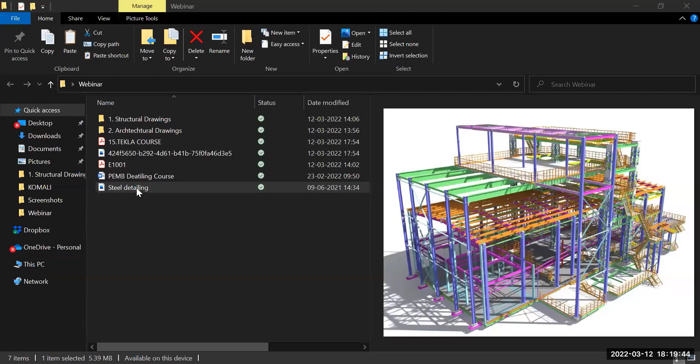I'll show you what is in Tekla Structures and what we can learn in Tekla Structures, and what things we can learn in the civil engineering, structural steel industry.

Guys, in the Tekla Structures, the screen is visible, guys. Hello? Yes, sir. Yes, sir.

This course is completely based on 45 hours of time. In these 45 hours, we have separated every element of what we are going to learn in this session.

See guys, first starting with Tekla Structures, we are moving into the detailing part. Tekla Structures is a tool which gives an output like a 3D model and 2D detailing drawings.

We will go deep in the learning sessions, but I'm just giving you an idea why we are using Tekla, what outputs come from Tekla, what PEB is, and what the difference is between PEB and main steel buildings.

PEB buildings are pre-engineered buildings. These buildings are very light compared with complete structural steel buildings, and mainly these PEB buildings are used for cold storages, storage facilities, and some commercial purpose things. These PEB buildings are very lightweight and cost-effective.

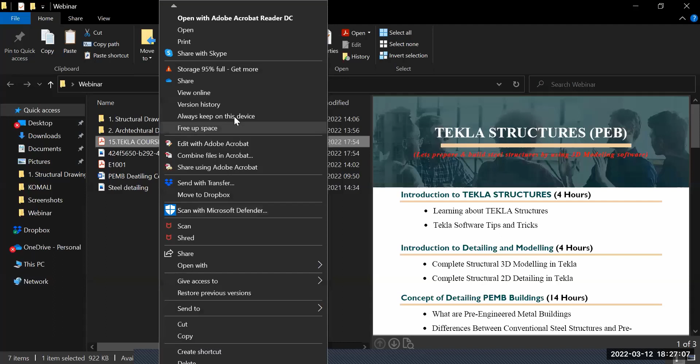I have opened it properly. It's still... So try to use Microsoft Edge, open with Microsoft Edge, I think it will work. I think it's default, it's going to pause. Right click it and open it. Yeah, that's what I did.

Now you can see, guys. No, sir, actually it is not. So please try... Stop screen sharing and you can try it again. Yeah, I'm trying.

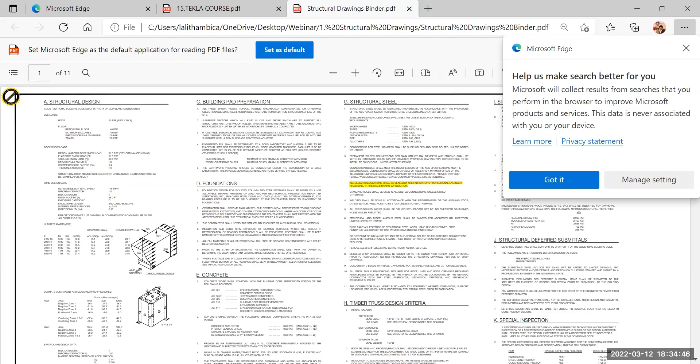Sir, still it is not on our screen, the main screen. I think you are showing something, but we are only seeing... Microsoft Edge please, right. Can you guys see this now? Yes, sir, it's fine right now. Fine, right?

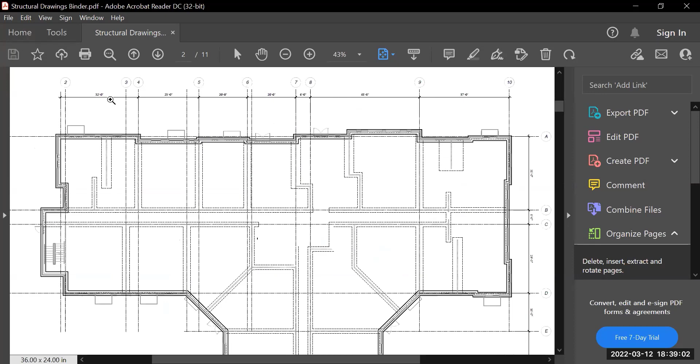What walls have they used here? What is the wall dimension? These we will call grids.

These things are grids. Whenever a building is constructed, without a base point we can't do anything, and without proper planning we can't do anything. These are the things we need mainly.

If we are going to construct a structure, the grids play the main role in a complete steel building. They give X grids as well as Y grids. These are the grids, and this is the complete foundation plan.

In this foundation plan, if you take a structure, it will be in different levels everywhere - starting from foundation level, level 1, level 2, level 3, level 4.

Following the same procedure, we get the drawings accordingly. If there is a foundation level, we get a foundation plan. If there is something on level 1 - slab, doors, windows - we get the level 1 plan. Same with level 2. So depending on how many levels they are going to construct, that many level drawings they give us.

It's a complete design set. There is a complete difference between designing and detailing. They will design the building, and we will detail the building.

We help the fabricator and erector to construct a building, and architects help structural engineers form a 3D building and produce detailed drawings for the fabricators.

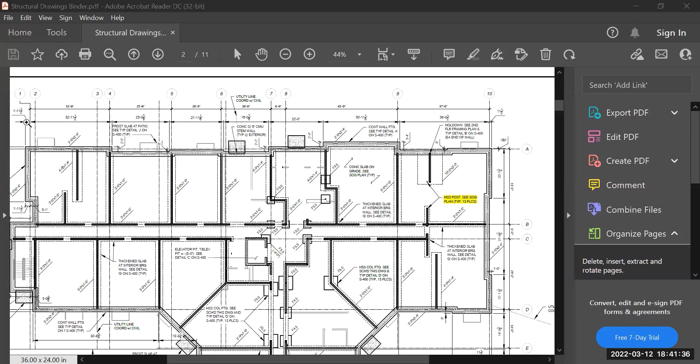So these are the main things. If you see this detail, if you see the structural drawings, they have given complete details. What are the things they need to construct? They need to construct this concrete wall. See this 2 feet, 2 feet 4 inch, and what is the slab type, and what is the concrete CMU stem wall, how many inches of CMU wall, everything they will give.

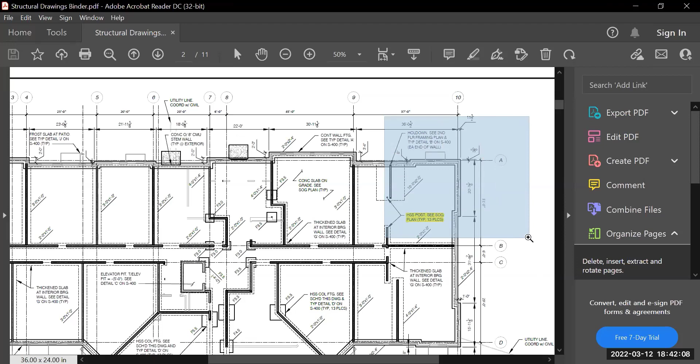And we are going to, this is just a 2D drawing. We are going to form this wall in 3D with the help of Tekla Structures. See all the details they will give, what they want to build. So before erecting, before forming a structure on a real site, we are going to construct the building using this software.

And we are going to construct first, and we will see what we will see, and we will rectify the problems, and we will grab the problems, and we will provide a solution. We will have complete contact with the architect, and we will have conversations.

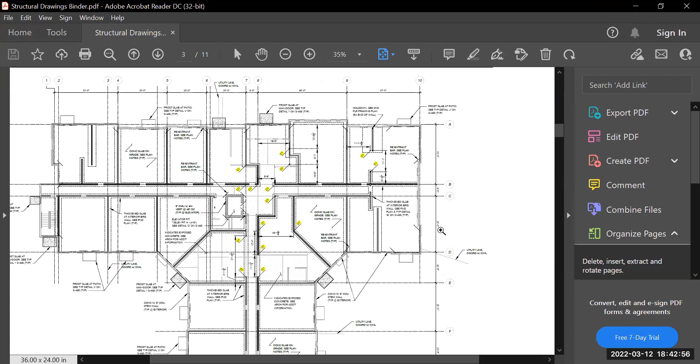If we are facing any problems, they will help us, and with their help we are going to complete the structure. See, this is above the foundation, there is one floor. This is the plan of that floor. See everything, concrete slab, what is the slab, what are the things in the building, you are going to see here.

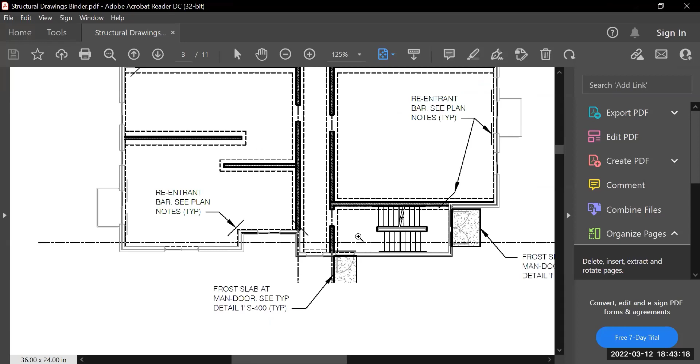Slab, what are the entries, where is the staircase, what are the entries, doors, windows, everything we are going to see.

See, this is the second floor framing plan. So in this, we are having trusses, 24-inch deep wood trusses. What are these trusses? What is the beam? What are the beam sizes, column sizes? What are these things? See guys, if you see here, these yellow markings are beams.

So what is this beam? What is this W18 by 76? What is W14 by 34? If we see a design drawing simply, we don't know what these things are. We can't understand. So we are here to help you understand the things.

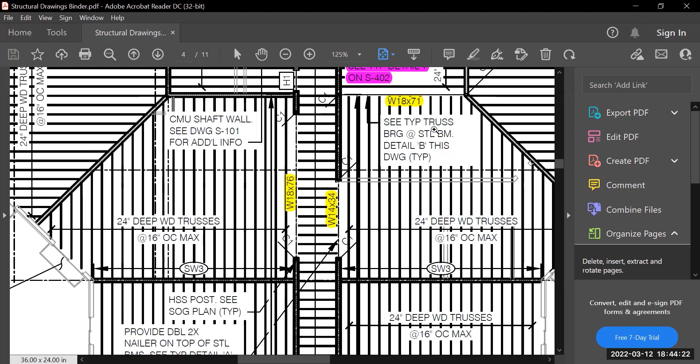We are here to help you go and perform your best wherever you join or wherever you work. So these are the things we will get from the clients.

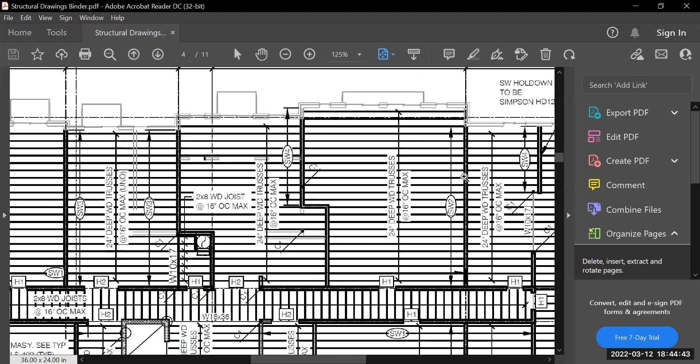Yes, it's a complete second floor framing plan. What are the things they have used? Steel beams, 24-inch deep wood trusses. So what are the distances we need to follow? What are the things we are going to place? What are the things we need to detail?

Everything they will give. See guys, everywhere these grid dimensions were there. So the complete structure is based on the grids. Without these grids, we can't do anything. Frankly speaking.

See, this is the fourth floor. You see this? This is second floor. This is third floor. This is fourth floor. You can see the title also here. This is the second floor drawing. This is third floor drawing. This is fourth floor drawing.

So every floor, each and everything that is in the floor, what we are going to keep, what they are going to construct, everything they will give, not just simply a design drawing or nothing like that. This is completely a full-fledged detailed design sheet. We are going to prepare a 3D model with the help of this only.

If we miss anything, any small detail also, we will face the issue. That is the main reason nowadays clients prefer more advanced software, just because of accuracy, just because of quality. They are going to pay, but they need quality and accuracy. We can't get quality and all from other tools, but Tekla Structures is completely designed for structures, steel structures.

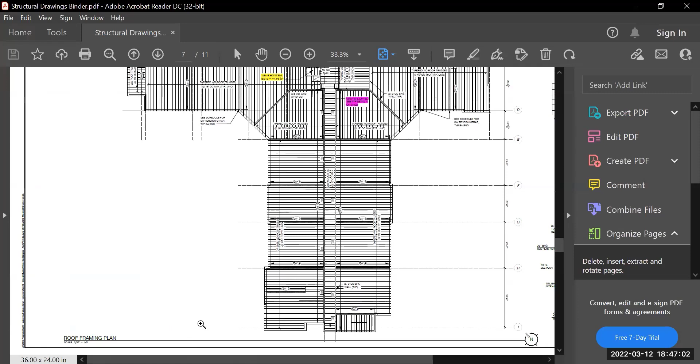See, this is the roof. Completely the top of the structure, roof. So after this, there will be nothing. This is the last plan. After that, see this, all the four side elevations.

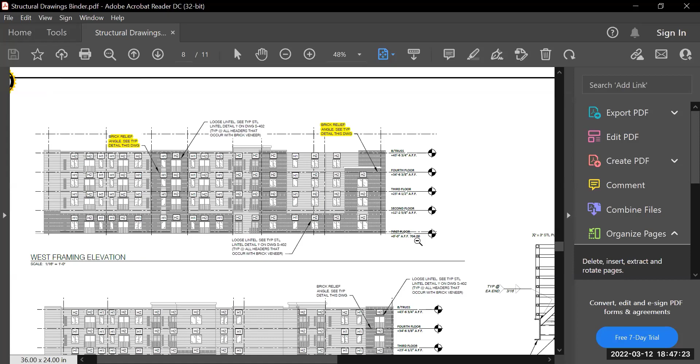West framing elevation, south framing elevation, east framing elevation, north side framing elevation. So four sides, how the structure is. These many floors are there. If you see, every floor, from where it is started. This is the 0, 0. From 0 feet to 43 feet. So a 4 floor building, 4-storied building.

So what are the windows that are there? So where are these windows? What are the things?

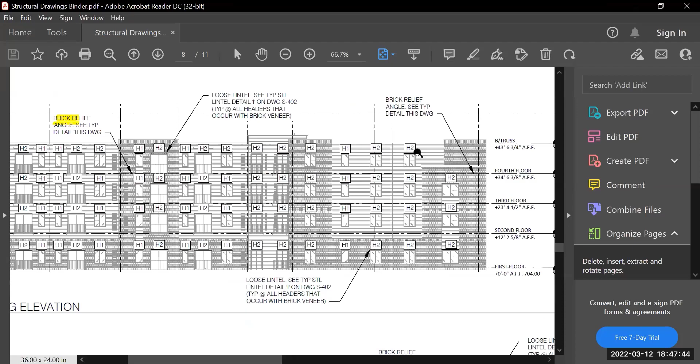What types of windows have they used here? Everything they will give in detail. See this complete details - what are the plates they have used, what are the metals they are going to use in the field? We are going to place this completely. Whatever you guys are seeing, we are going to place in the 3D - how the real plate is, how the real beam is, everything, how the site, the job is going to erect in the site. You are going to model that in Tekla Structures. We are going to learn about that complete 3D modeling.

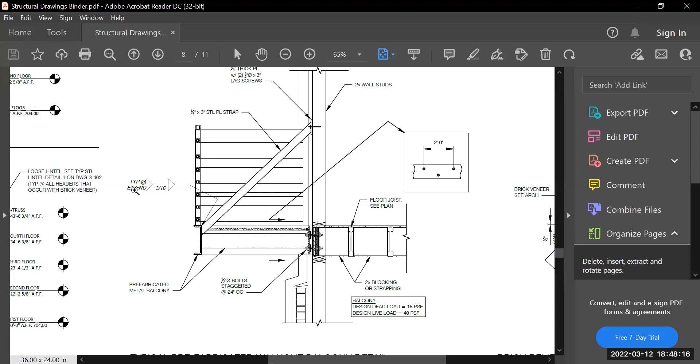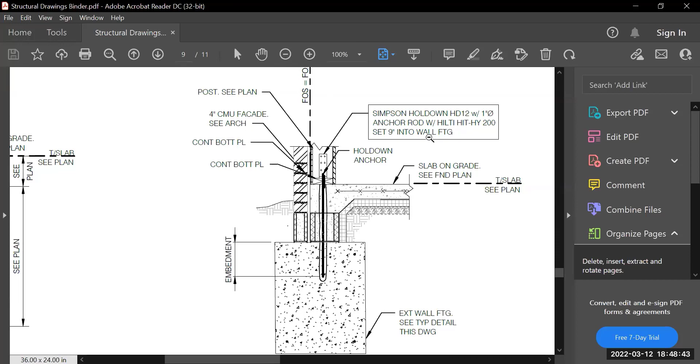Footing details, foundation details. And I'm giving you one more clarity guys - we are not going to do anything which is related to concrete. We will just place it for our reference. We are completely on the structural steel buildings.

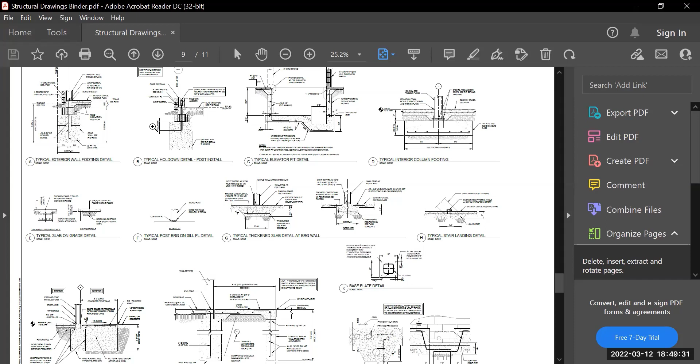Those are PEMB buildings, pre-engineered metal buildings. There is completely different between PEMB buildings and structural steel buildings. If you Google, guys, you will get to know. And even in our course, we are going to tell you about the differences between these PEMB buildings and structural steel buildings. Structural buildings are very high cost and very strong also, but PEMB buildings are not like that. These are strong, but very cost effective buildings, and as well as very simple to fabricate and erect. That is the difference between the PEMB buildings and structural steel buildings.

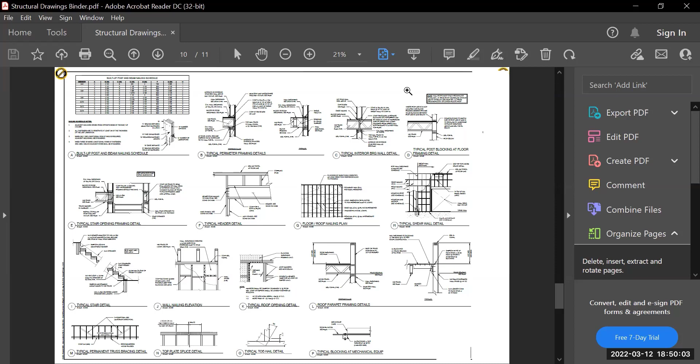We are not going to learn about PEMB buildings completely, but what I am showing you guys is an example - that's it, what drawings we are going to get from the clients. Don't think on this job we are going to work or we are going to learn, this is just for your reference, like what things we are going to learn and what things will be available in this structural steel detailing part. I'm just showing you, that's it.

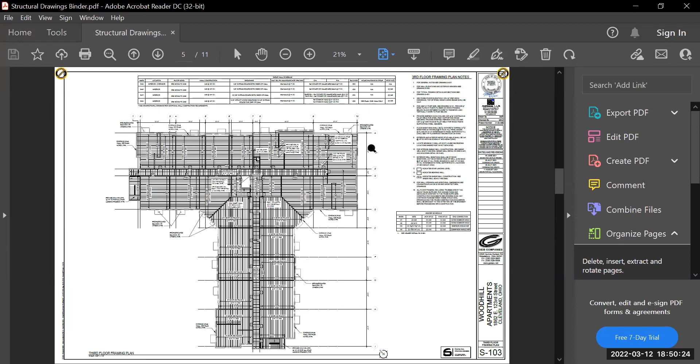See this complete lintels, bearing details, everything they will give. This is the input from the architect. With the help of this input only, we are going to produce the complete drawings. This is the complete set of a design drawing.

These are the main first phase. If you get any project, if you want to start any project, you need this page - without this page we can't do anything. This is the basic part of the structure. You will get the complete details here.

Like what are the structural steel? What kind of structural steel we are using to construct this building? Wide flanges, tubes, high strength bolts - what are the bolt types, bolt standards? Everything we are going to learn, how the bolts will be.

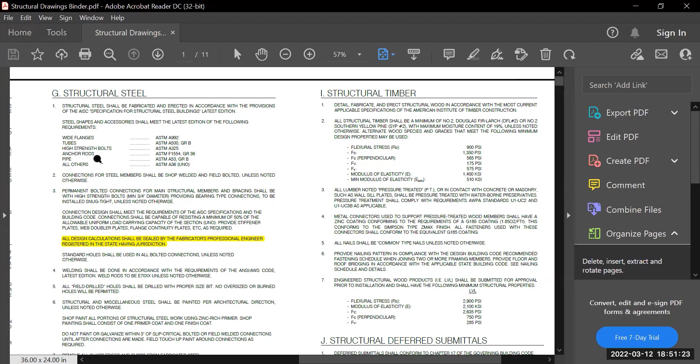If you went to any workshop or any fabrication shop, you will see the bolt, right? Whatever the bolt is exactly there, we are going to model that bolt in Tekla Structures. So if there is a problem, we are going to solve it - we are going to solve it here itself.

That is the most interesting part in Tekla Structures, the problem solving. And you will get to know about all the advanced things, whatever they have developed till date. We are working on the latest Tekla Structures, 2022 versions and 2021 versions. And there were some versions - 2020, Tekla 20 version is there, Tekla 21.1 versions are there.

Some clients will use Tekla 21.1. Why? Because Tekla Structures, they are completely advancing their tool. Tekla 21.1 is the last version which is friendly for everyone - we can easily learn in that, we can happily understand that. But 2021, 2022 are most advanced and somewhat bit complicated to understand. Those are highly advanced, and we are going to learn on the 2021 and 2022 versions, and as well as 21.1 also. For understanding purpose, we will cover everything.

Nothing like this and that only. Why? Because as we promised you guys, if you are going to join a company or you are going to work somewhere, you will be confident. You will not feel like a fresher. We can definitely assure you that.

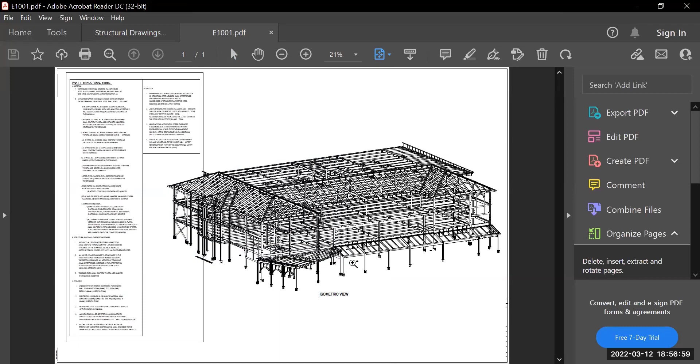Whatever structure I have shown you, we have developed a 3D structure with the help of this. This is the 3D structure we developed in Tekla. See guys, all 3 floors from the foundation and roof, how we have developed this. See the window openings, what are the things they want to completely construct this structure. So we have developed this 3D model and created this as an erection drawing just for client reference, showing how the structure is. After designing, we have detailed this 3D model.

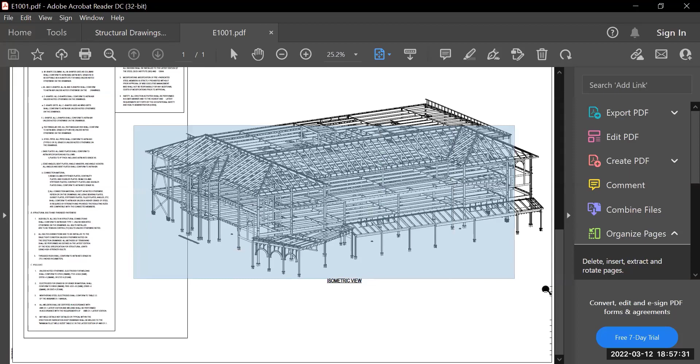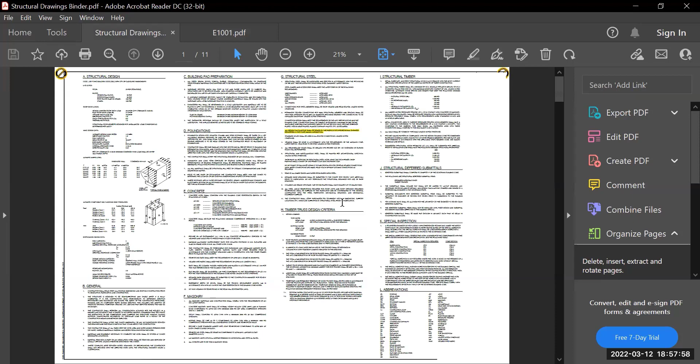You guys can see everything: columns, beams, floor wise, first floor, second floor, third floor, and roof, and what entries they have. This is the complete isometric view of a building. See the difference between the design drawing and detail drawing. This is the design drawing for the 4 floors, and from the design drawing we have detailed this drawing. This is the 3D model we developed in Tekla.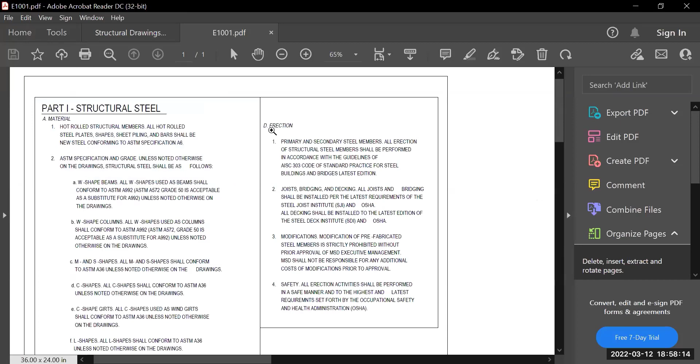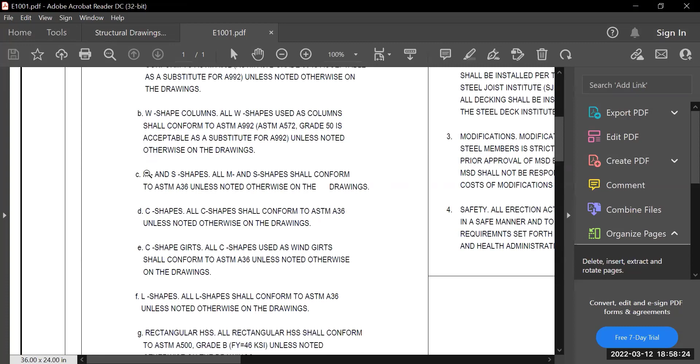See, all the things we are going to give them in detail: what will be the erection process, what material we have used - A36, everything, for plates too, what material things we have used - we give in detail. That is the difference between the designer and the detailer. The designer gives an overall sense of how the structure is, but the detailer constructs the structure itself, not just inside the tool.

That is Tekla Structures. So we are going to learn in depth everything: what are the erection drawings, how we will create these drawings, how we will develop these drawings, and what is the methodology to develop these erection drawings.

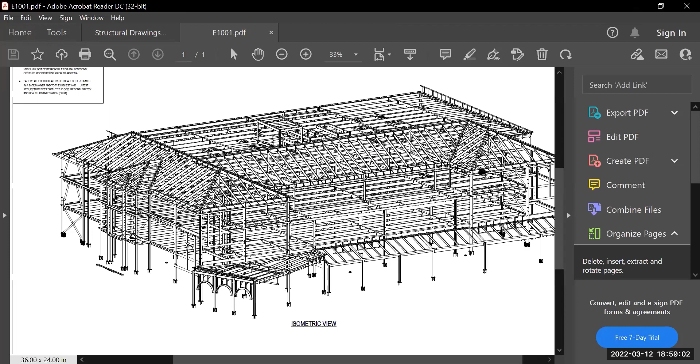Same as detailing, there are 2D shop drawings also. See guys, if you want to build this structure, you see these beams here - a number of beams, same with a number of columns. So they will fabricate these beams separately in the workshop, take each piece to the field, and connect them with the help of connections.

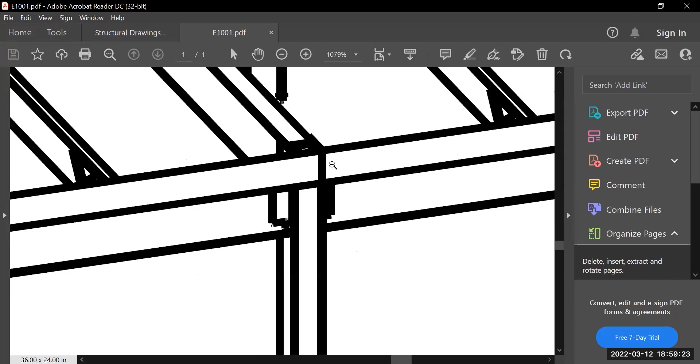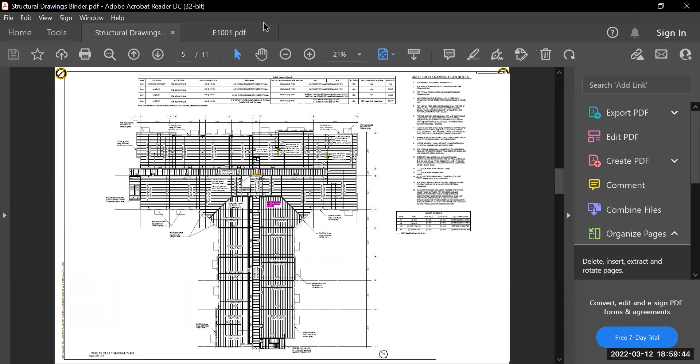See this, now what I'm doing is showing the column to beam typical connection. They will take all the single assemblies to the site, erect them - beams and all - and connect everything to form a structure like this. But you guys will get a doubt: why detail? With the help of this design drawing itself, can't we develop this drawing? If you gave this drawing to a fabricator, how much length of this beam does he want to fabricate? How will he know?

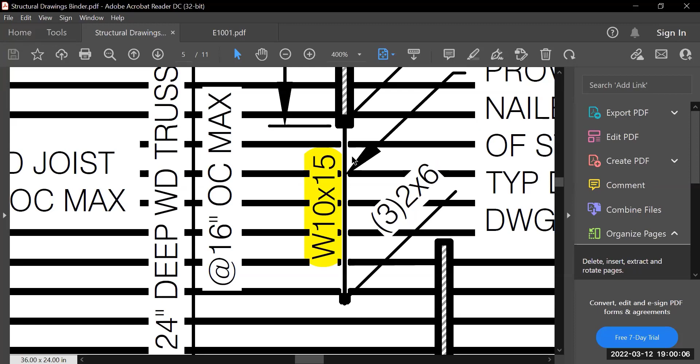What is the material he will use? What is the length and how it will connect to the other part? If you see here, these things, they can't — if they even tried, they will never get a chance of understanding these things. We are the structural steel engineers, we will study the complete design drawings, and we will develop these 3D drawings.

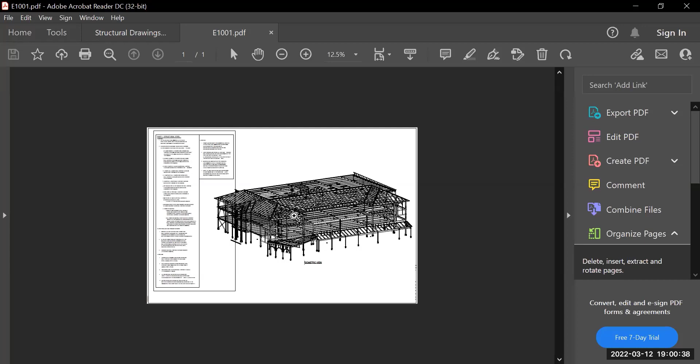We will help the fabricators to understand the structure and fabricate very easily and erect very easily to develop a complete structure. This is the main role of us. So we are going to learn these things in detail in the complete Tekla structures course.

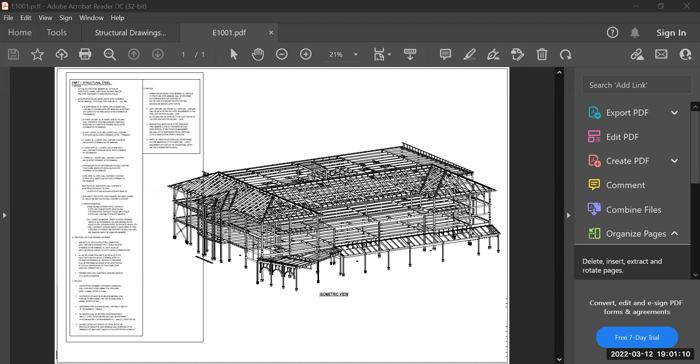Already I have shown you guys the PEB detailing course, and what is our price for this course.